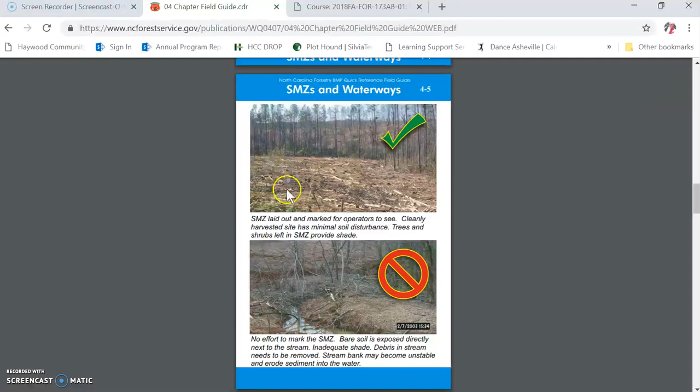Okay, whoops, it looks like I went a little too far with the last video, so I'm backing up just a little bit here. So here's an SMZ that's well laid out, that's flagged in very nicely. The contractor knew where to go and where to stay out of.

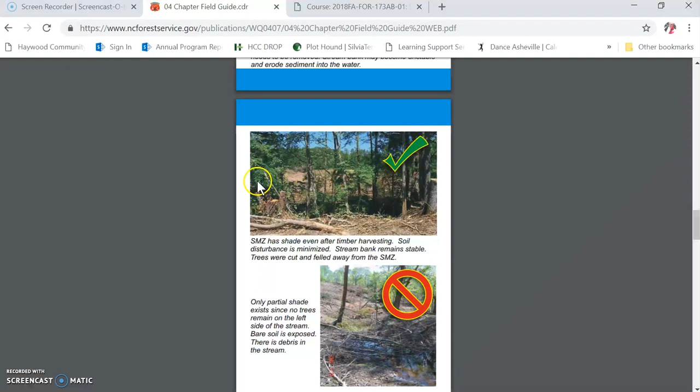Here it wasn't laid out quite so well, so the contractor ended up moving into there, and next thing you know, you got bare mineral soil right down to the creek, which is bad. Okay. Here they probably pulled out a few trees, but they kept about 50% of the shade. That's perfectly fine. And here they actually pulled out a little bit too much, and so you're starting to get sunlight down into that stream there, and it makes it too hot on a hot summer day.

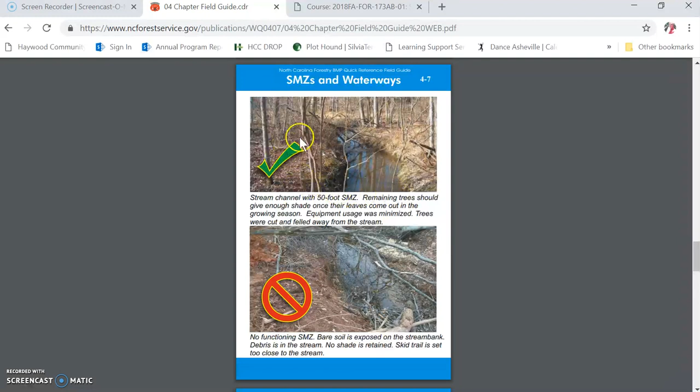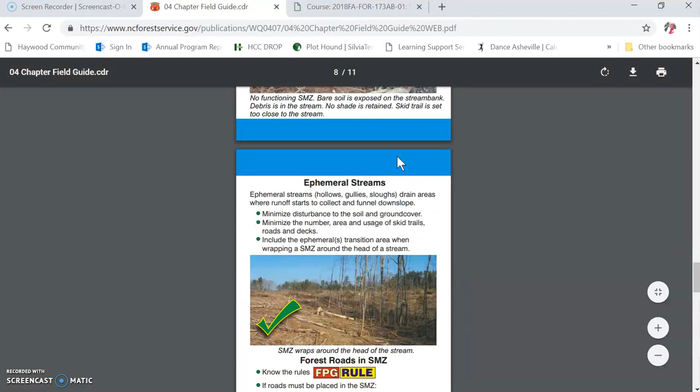Great SMZ, okay, 50 foot on either side. Here they went right up to the edge, debris down into the creek, bad stuff, okay, don't want to do that. Here's an ephemeral channel, and they just went up pretty much to where the channel looks like it pretty much stopped, and just kept that area kind of shaded in there.

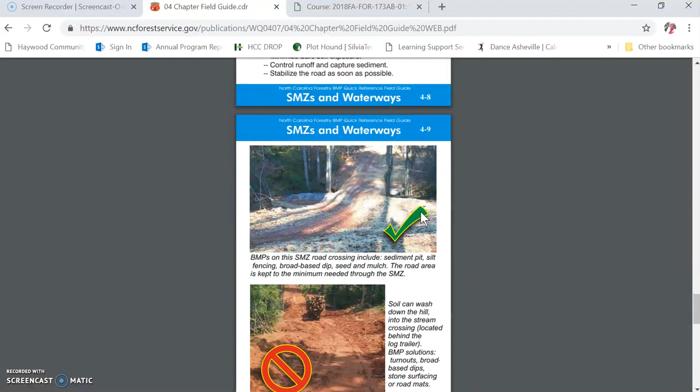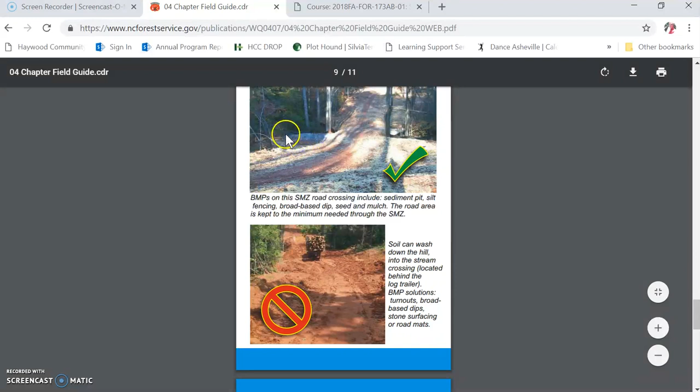Here's a BMP inside an SMZ, and so here's the creek right here, and notice that they put a little check dam right in there to pond that water up to keep it from going directly into the stream. So this holds that water back. Compare that to having a stream crossing going through your SMZ and just letting the water have its way. That is serving no purpose.

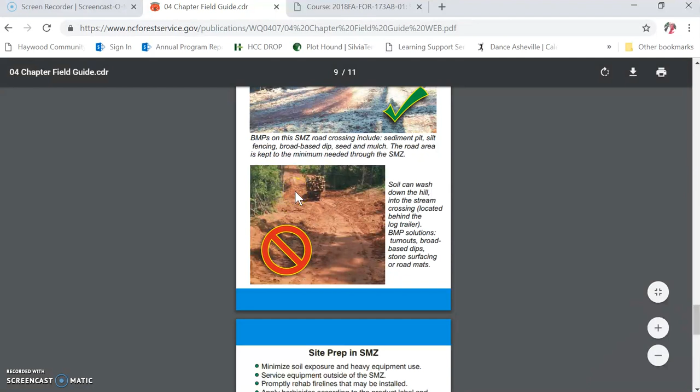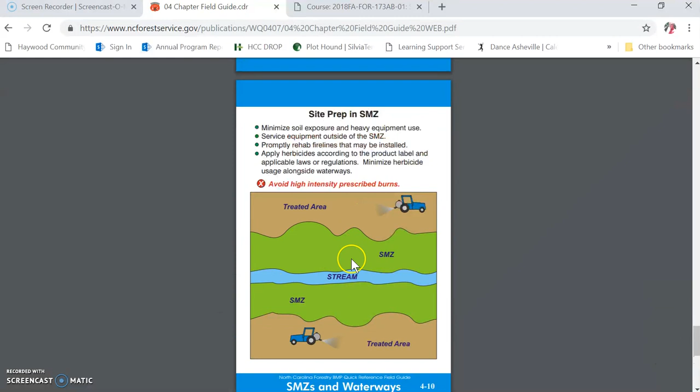This SMZ is not able to capture any of this silt or any of that soil that's being eroded here. This is going to be the number one primary spot for stream pollution because of the logging. These areas always end up being the number one. Right? So certain things you can and cannot do in SMZs, applying herbicides, burning, stuff like that.

Okay. So I'm going to move to one last one here, and that's on stream crossings. And the thing that's important to know about stream crossings is you can have temporary stream crossings. The Forest Service will provide you with bridge mats. You can borrow them and lay them out. So you do not have to have a full-blown bridge or anything like that.

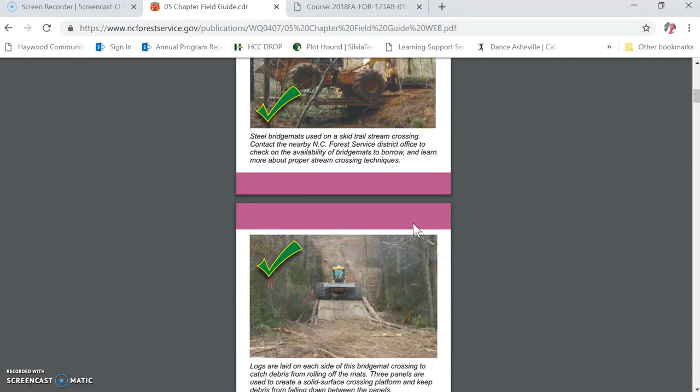We talk about this much more in the soils and logging course, and we'll also talk about it in the forest management class a little bit more too. But I just want you to be aware that building bridges across streams, temporary bridges, is a very, very good solution, okay, rather than just plugging a road right through there.

So there's lots of different options for that, good and bad, and we're not going to get into all the details for that. But even if you got a ditch right by the road, you can have your logging trucks go over that bridge mat there. Excuse me. I wanted to move down into the culverts.

Okay, culverts are pretty important for you as part of a planning process. If you're trying to put a road in for somebody, you can put in temporary culverts for logging operations and then pull them out when you're all finished. But more often than not, you're planning on keeping them in a permanent road.

So the thing that's important to remember is don't ever use an undersized culvert, especially if it's going to be a permanent road, because it will blow out. You plan for the largest type storm event when you're planning the culvert size.

Another thing to remember is that if I need a 30-inch culvert based on my specs, two 15-inch culverts will not do that, all right? So don't put two 15-inch culverts in and think it's going to replace a 60-inch culvert or 30-inch culvert. It won't, okay? So you'd use the charts that I'm going to be showing you here.

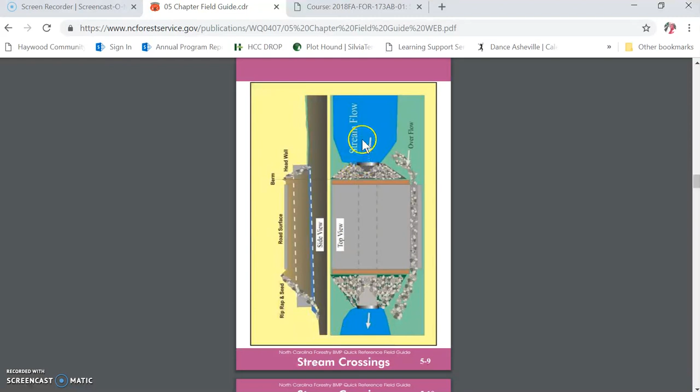This gets a little bit into how you place the culverts in. Basically, you lay it on the stream bottom. Okay, let me flip this a little bit. So you lay it on the stream bottom. You don't lay the culvert up above the stream and expect the water to run up and into it. It's got to be right on the stream.

And it's got to be at the same slope as the stream. You have it stick out a little bit on the downhill side, and you secure it with riprap and get it vegetated. Okay, what you don't want is this thing to be sitting 3 feet up in the air and dropping water down onto the soil, because it'll start eroding it away.

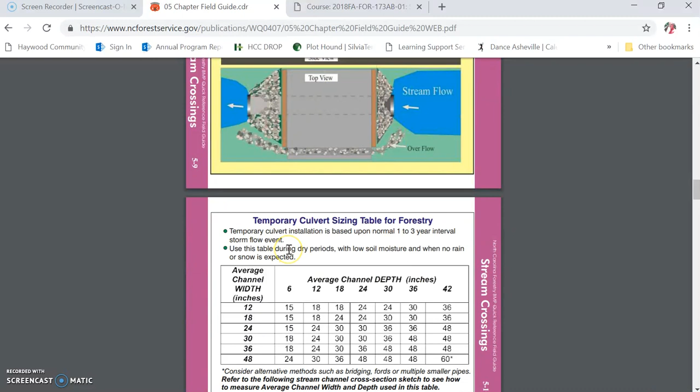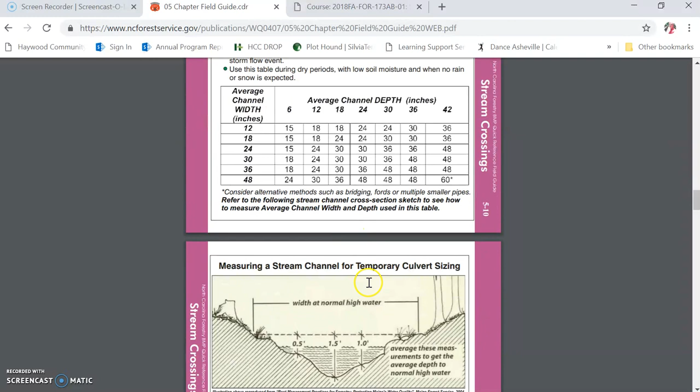So there's temporary culvert sizes, okay, based on the average channel width and the channel depth. So if you're doing a logging job, you can go ahead and use these guides to figure out what size culvert you're going to be using. However, if you're going to be putting in a permanent culvert, you probably want to use this chart here, and it's not as complex as it really looks.

Okay, so basically what you're doing is you put a dot on the map where you want to put your culvert, and you figure out what is the drainage area around it. So that's why we did that practice with calculating the acreage around certain points on maps. And so once you figure out your acreage, your drainage area, this is based on a super duper rainstorm intensity of 2.5 inches per hour rainfall.

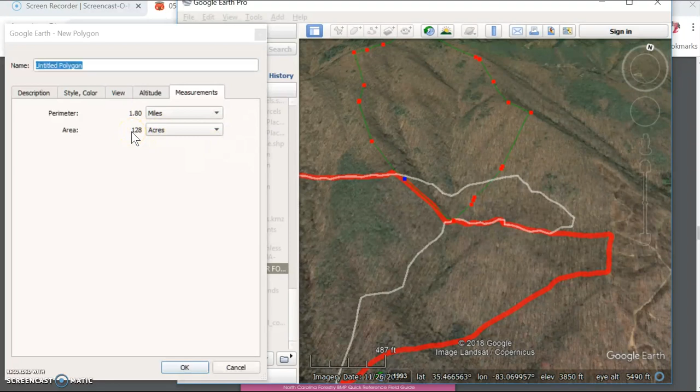Okay, so you got to balance it because culvert is not cheap, and like I said, you got to lay it down into the stream channel. So it's probably going to be about 25 feet long for each of those culverts that you're putting in there.

So you've got to kind of balance those sorts of costs there. But that's basically how you would go about doing it. For a test question, I would probably give you something like, oh, I've got 40 acres and I want to use a C coefficient of 0.6. All right, so I'll try to make it more straightforward for you with that. But I just want you to see how you use these charts. Okay, so again, that's a really good way of sizing up your culverts.

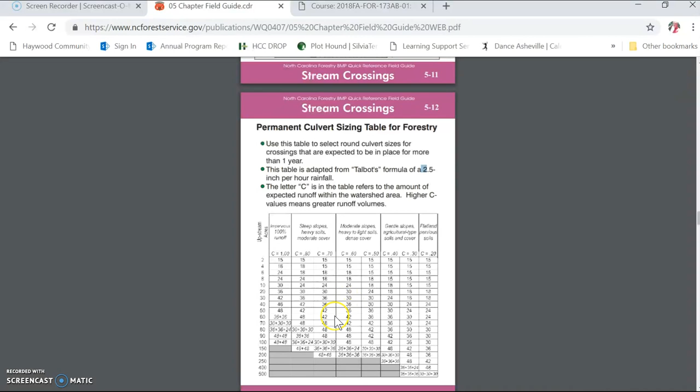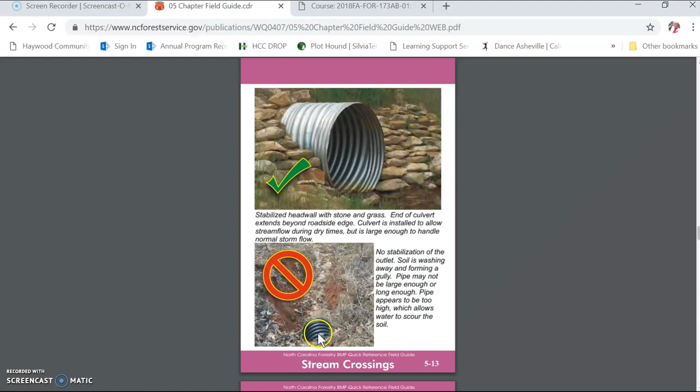All right, that's more or less what I wanted to show you with this manual here. Again, make sure you've got it vegetated. Make sure that you've got it stabilized with rock. There, it's not stabilized at all. We see this way too often up in the mountains. That's just going to erode away.

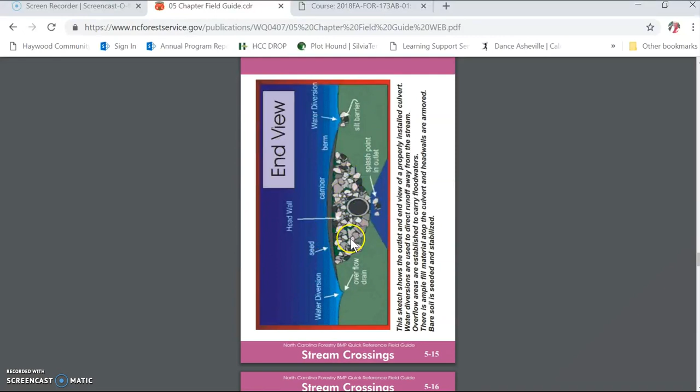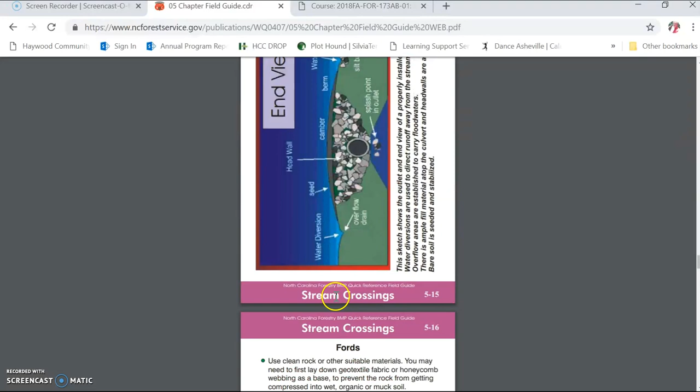Okay, so it shows you how to build a good headwall and how to get the water out so it's not going to be eroding things away. It talks about fords and stuff like that. I'm not going to get all into that. But that's essentially some of the things I want you to get out of this in terms of water quality. How do we keep our streams nicer?

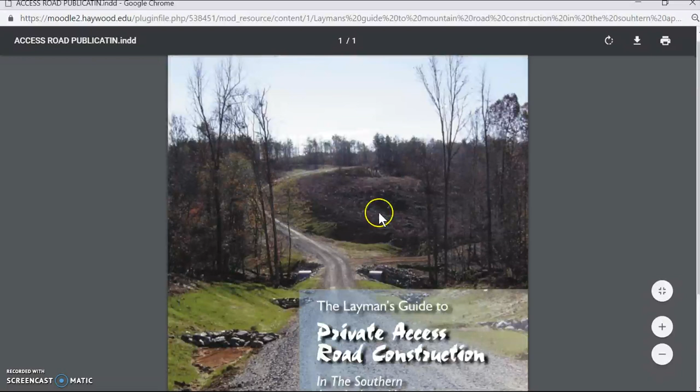All right. The last thing I wanted to point out to you is this Layman's Guide to Road Construction in the Southern Appalachians. This is a really, really great guide. And let me get a little bit larger here. This was written by the folks at Coweeta, and it basically has a lot of really good information.

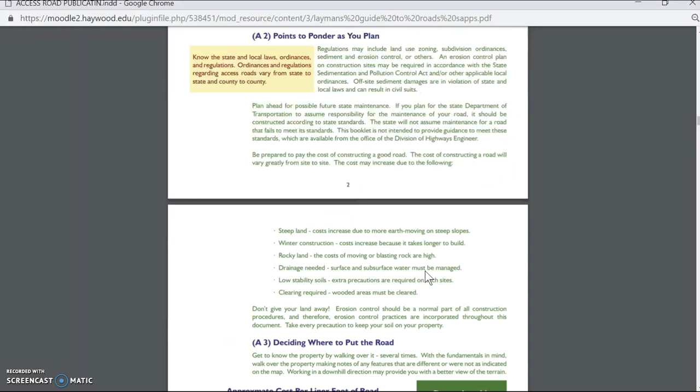So this book has a lot of really good dynamics, and you can see it was written by our friends over at Coweeta a number of years ago, and then it was revised about 2005 with some really good information. But this is just an essential book for developing permanent road systems. All right, it gives you some basic cost estimations.

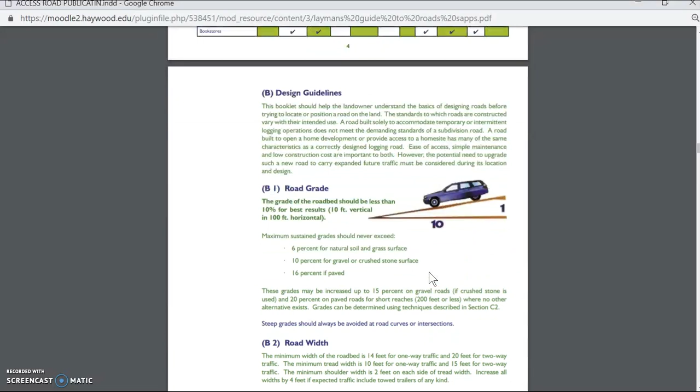They're a little bit old, but you can get some general assistance in designing roads, road grades, what are the best grades for certain situations, how do you do the upslope cuts and the fill slopes. Usually they're a 1.5 to 1 ratio versus a 2 to 1 ratio on the downhill side. And so just lots and lots of different examples of roads.

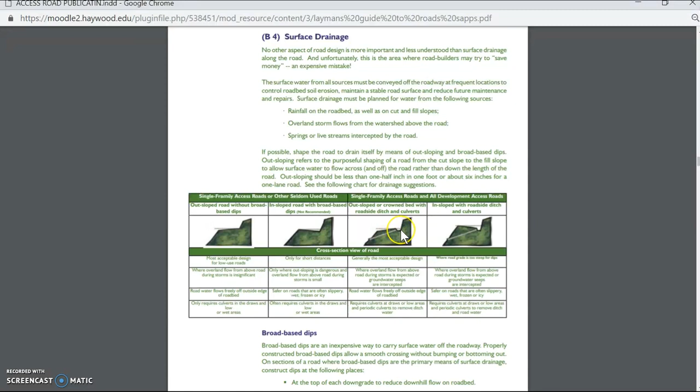That's that outsloped road I was talking about, with no broad-based dips; you can do an insloped road and then put broad-based dips in them. That's an outsloped road with an inside drain and cross drainage, and that's an insloped road with cross drainage. Okay, so again, a lot of stuff that we just kind of talked about, but in much, much more detail.

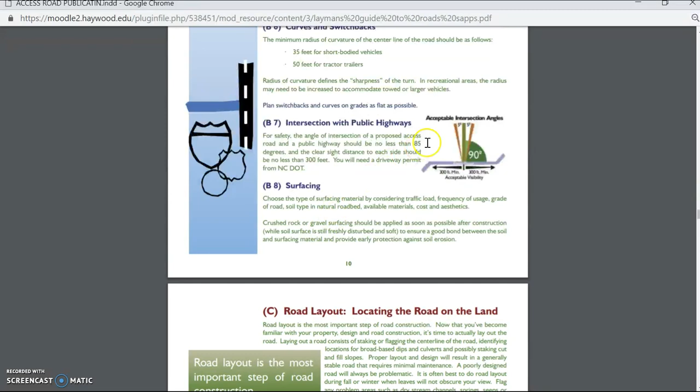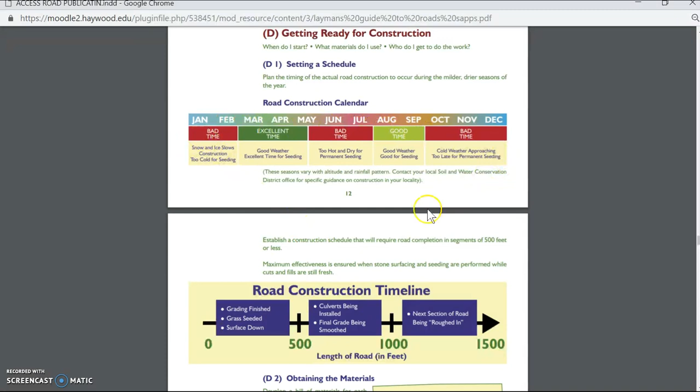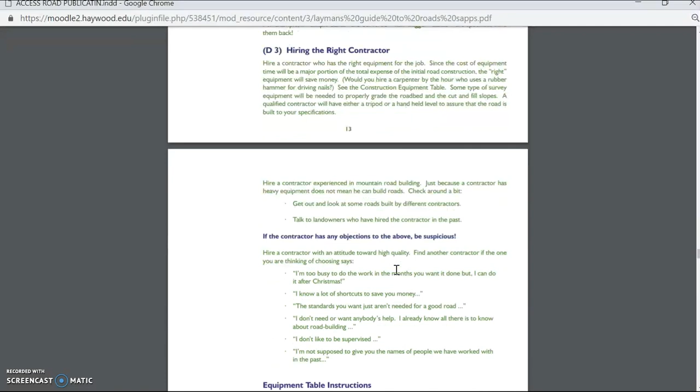What are the best types of couplings when you're joining together culverts? What type of material works the best? Entering highways, you want to be as close to a 90 degree angle as possible. It's just all kinds of great ideas. And then the best times to build. And then how do you obtain the materials? What's it going to cost you? Where are you going to get all that equipment? And then the type of equipment that's going to be used.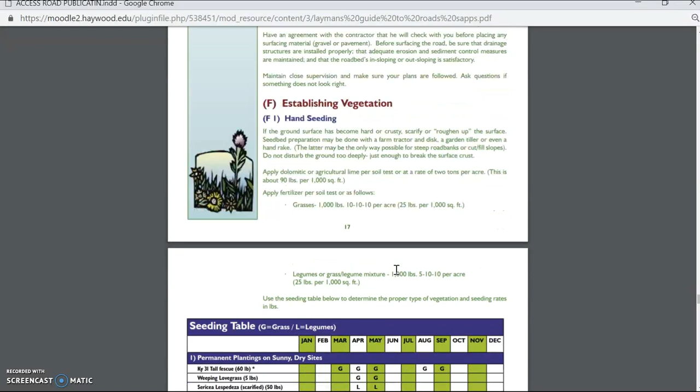So during construction and then establishing vegetation. And what's nice about this is that they're actually starting to include some of our native species as well in here. Switchgrass and those sorts of things are probably important to be included rather than just putting in orchard grass or creeping fescue, stuff like that. So it's nice to have some native species involved with that.

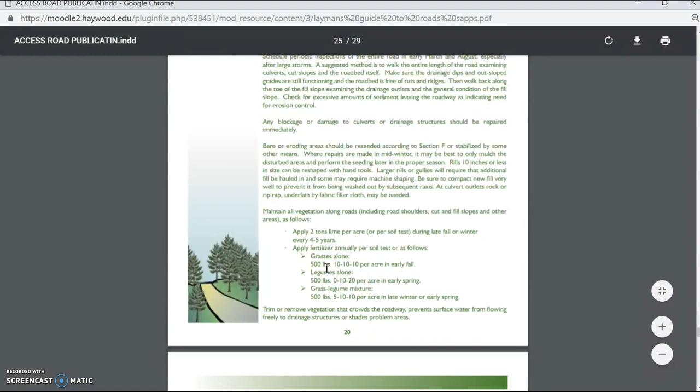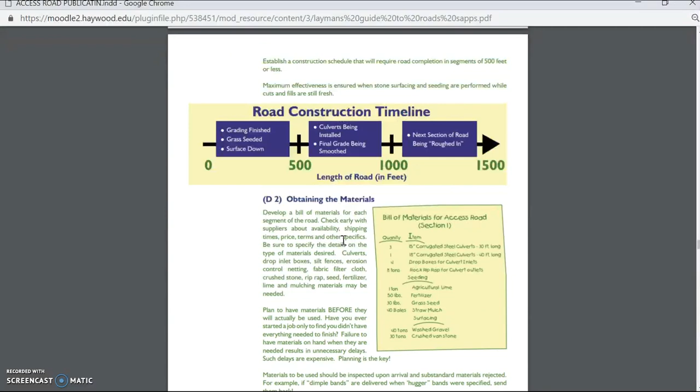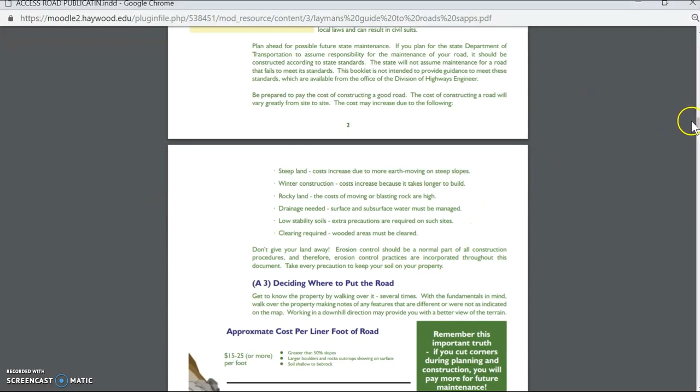And so again, just a really good document for you to hang on to. I'm not going to hold you to anything in this document right now, but if your landowner is planning on putting any kind of road systems in at all, this is just a fantastic document to get them up to speed so that they become aware of what you have out there.